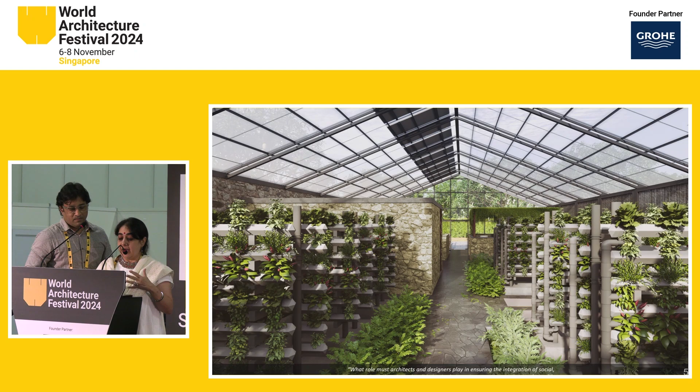Imagine future living - this is how we might be living. Future also holds possibilities like lack of clean air or water for sustenance, poor soil for cultivation, and scarcity of space. So what role must an architect play in ensuring the integration of social, economic, and ecological well-being in their projects? The future also belongs to rural and economically weaker communities.

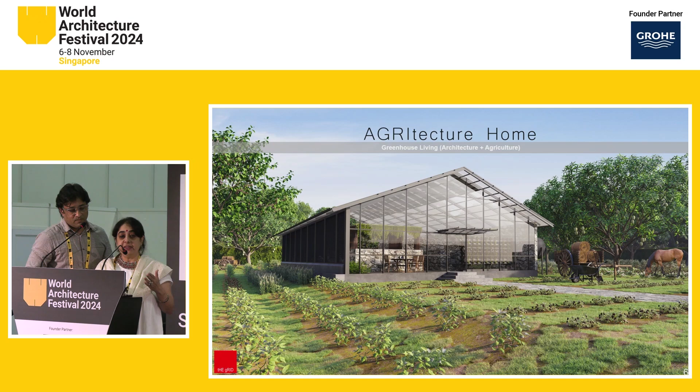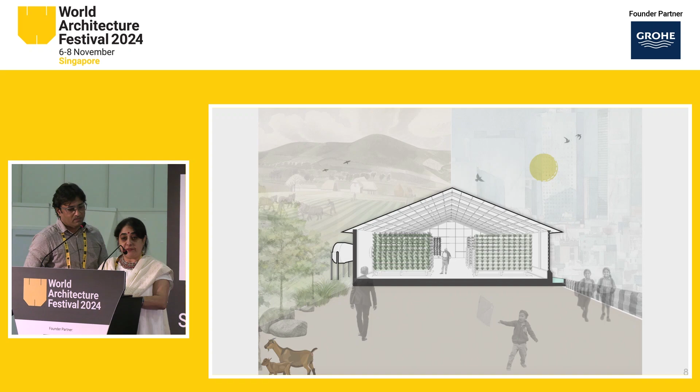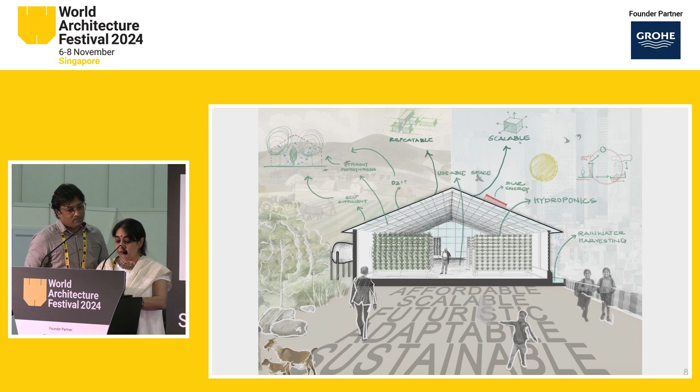This is our attempt at agritecture, combining the structure and function of a greenhouse with the functionality of a residential and workspace module. Why choose a greenhouse? When we talk of future home, we think of a home that addresses self-sufficiency in multiple facets: scalable, affordable, futuristic, sustainable, adaptable. Greenhouses are found in most places around the world. Our aim is to redefine the possibilities of agritecture.

A key feature of greenhouses is their ability to house hydroponic systems. The benefits are substantial: increased oxygen levels, higher production with minimal resources, and fostering self-sufficiency among users. The plan has all sufficient functions for living within the pockets created by the hydroponic zone. This unit has a solid wall of bricks or stone fitted with suction fans on one side, and the opposite side is made up of honeycomb pad and charcoal wall with an inbuilt automatic water sprinkler system. This helps keep the temperature around 24 degrees, ideal for hydroponics, and helps humans live comfortably.

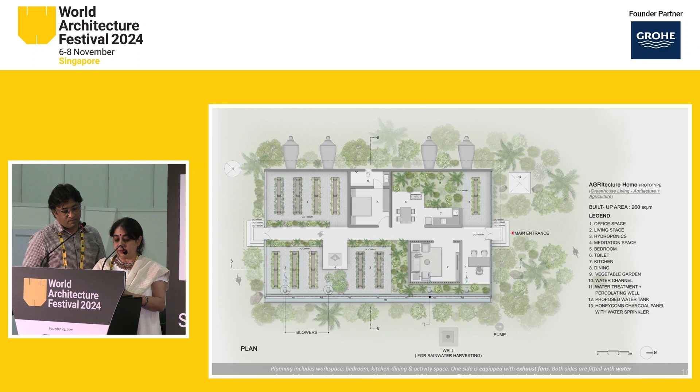This is a prototype proposed for a future experimental home - a single sample unit which is scalable, can be multiplied and duplicated. Both sides of the structure are fitted with water channels for rainwater harvesting, usable through a well and a hand pump. The honeycomb pad and charcoal wall combined with an automatic water sprinkler system ensure optimal conditions for hydroponic farming.

Suction fans provide adequate ventilation, contributing to energy efficiency and overall comfort. The charcoal wall regulates the greenhouse's temperature, utilizing charcoal's natural cooling properties; charcoal also acts as a natural water purifier. The pipe integrated with suction fans absorbs cool air and recirculates it, releasing it back into the interior space through underground conduits, much like the geothermal technique. This process not only conserves energy but also optimizes indoor temperature regulation, transforming the design into a hybrid model with a dual cooling method.

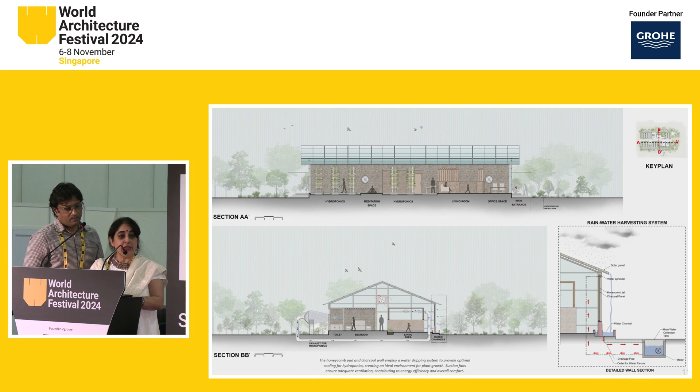The project emphasizes sustainability and eco-compatibility through several strategies, materials and technologies, utilizing reclaimed wood and MS, reducing environmental footprint. Polycarbonate sheets enhance natural lighting. The design integrates functional areas, highlighting soil-free agricultural efficiency. The project utilizes hydroponics to optimize food production, conserving space and resources while enhancing ecology. These practices provide for the family's needs and support the surrounding community through energy generation and locally produced food.

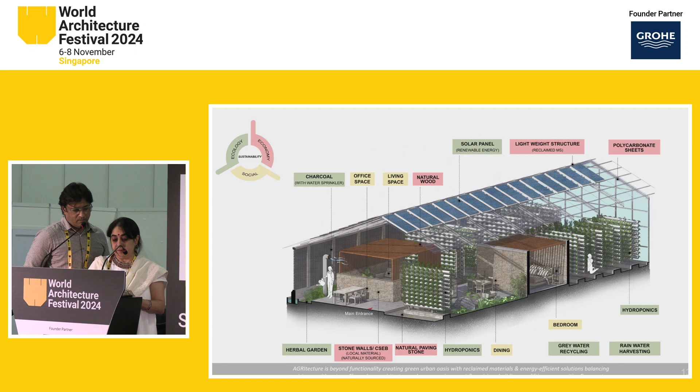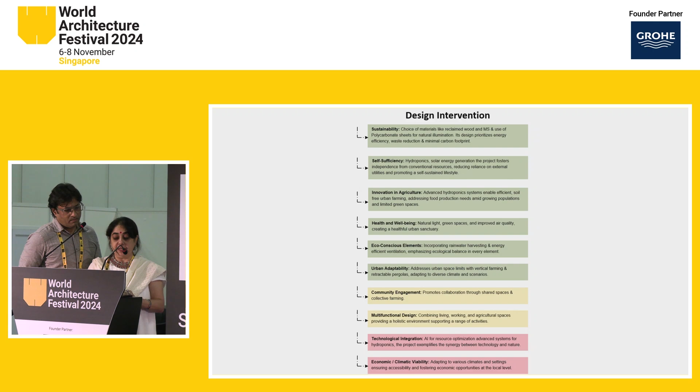This is the design for the honeycomb pad and charcoal wall. The design intervention achieves significant benefits: sustainability, self-sufficiency, innovation in agriculture, health and well-being, eco-conscious elements, urban adaptability, community engagement, multifunctional design, technological integration, and economic and climatic viability.

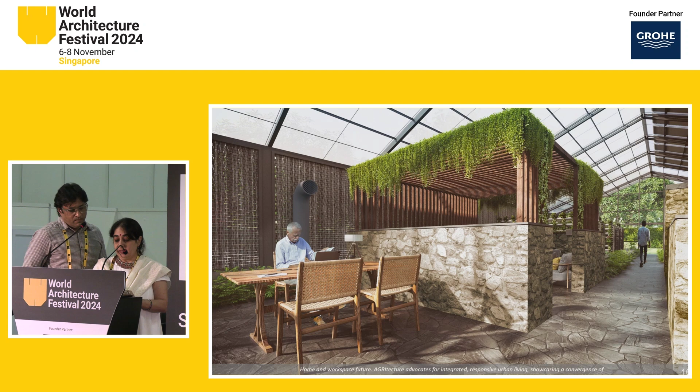We brainstormed various aspects to integrate agricultural elements with residential and workspace environments. The core principles of ecological, economic, and social sustainability are kept in mind, with reduced carbon footprint, improved indoor air quality, anti-aging effects, and enhanced mental well-being. Agritecture stands as an example of a symbiotic relationship between humanity and the environment, redefining the concept of a sustainable future home. It represents a shift in agricultural and architectural design and sustainable living. As agritecture emerges, we imagine a future where innovation and sustainability come together to create spaces that fulfill our needs and improve our lives and the world we live in.

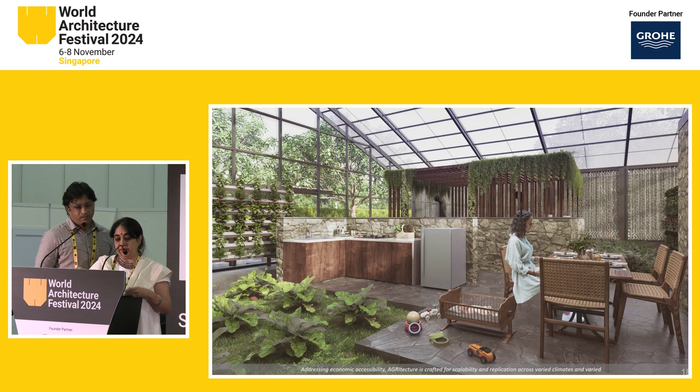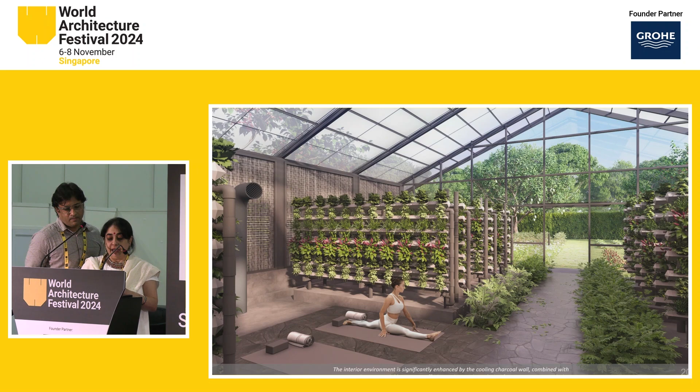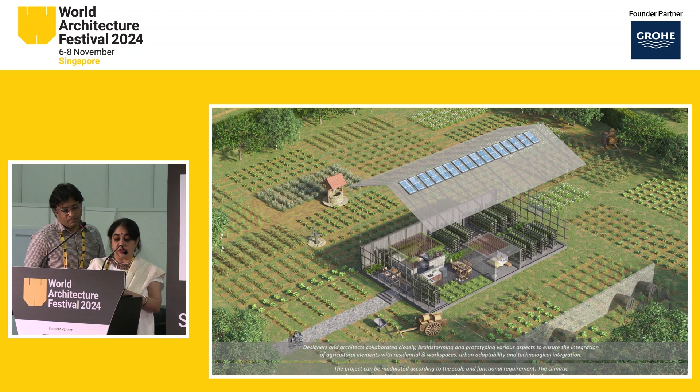Agritecture is a dynamic ecosystem that redefines the intersection of urban living and agrarian practices, advancing towards equitable and sustainable development. Innovative living spaces foster ecosystem harmony, envisioning tomorrow's eco-conscious responsive habitats, emphasizing urban adaptability, vertical farming, and technological integration - redefining homes for a greener tomorrow.

A very humble and honest idea for the future well-being of humanity. It is the conscious responsibility of mankind. Here we have used all natural materials and textures from Mother Earth. We would like to show you a quick video for the same.

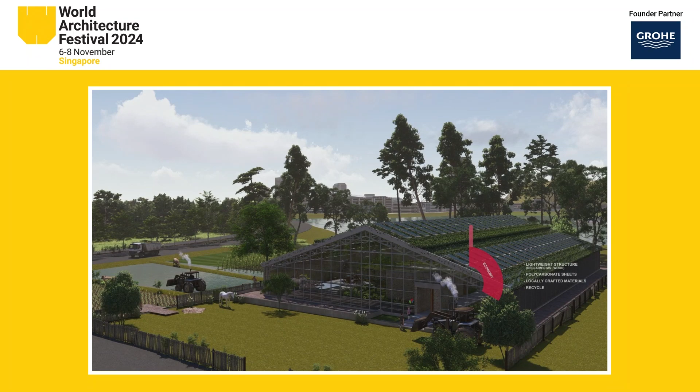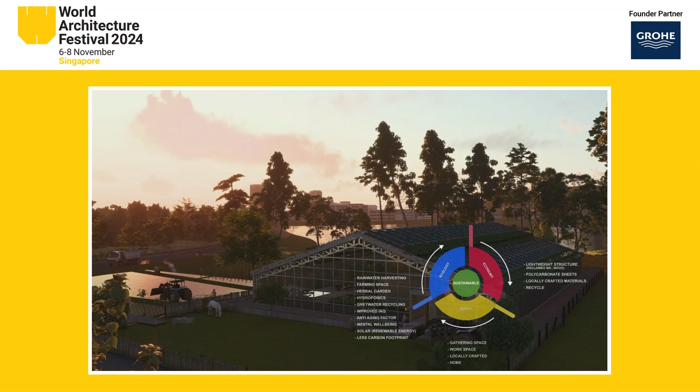This kind of structure can go completely off the grid. Your dependency is not there on any suppliers like water supplying or electricity. It is a completely self-sufficient structure. Thank you.

Our second presentation, also about food production, comes from Fractal Views, and it's called Parasol Agri Center, an Agricultural Center.

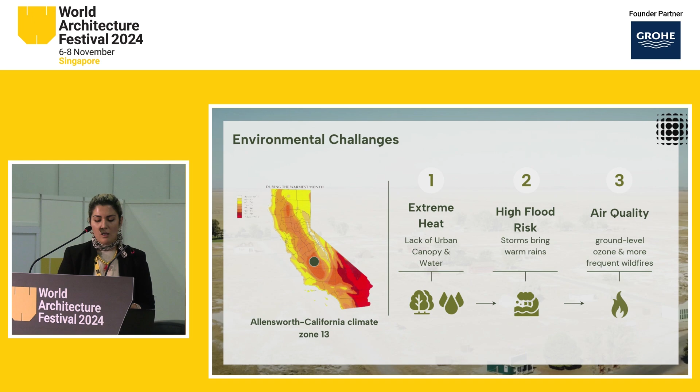The environmental challenges such as extreme heat and lack of urban canopy, being located in a high flood risk area, and air pollution caused by proximity to wildfires and factories around.

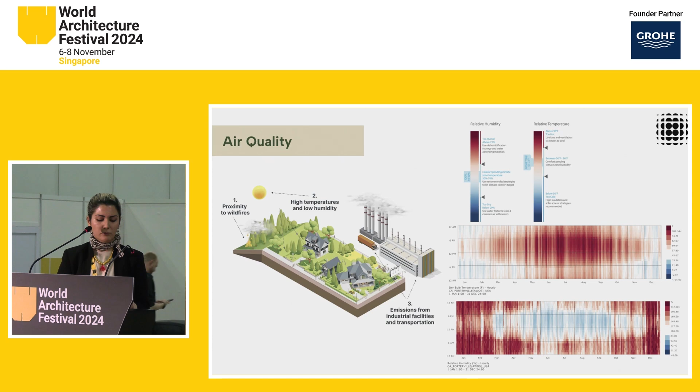The succession to the design of this project is also backed by experimental and iterative building science analysis. It started by some basic fundamental questions about how the building mitigates heat exposure while enhancing energy efficiency.

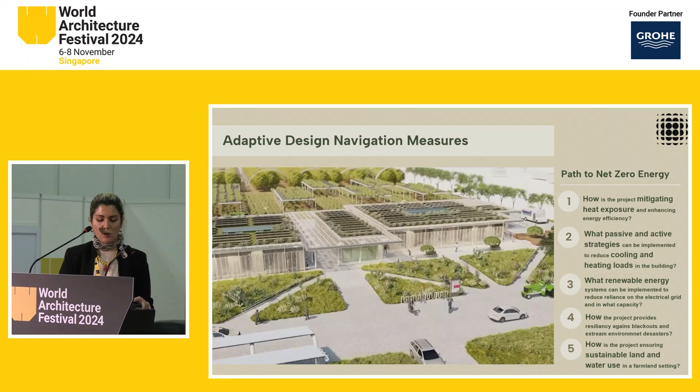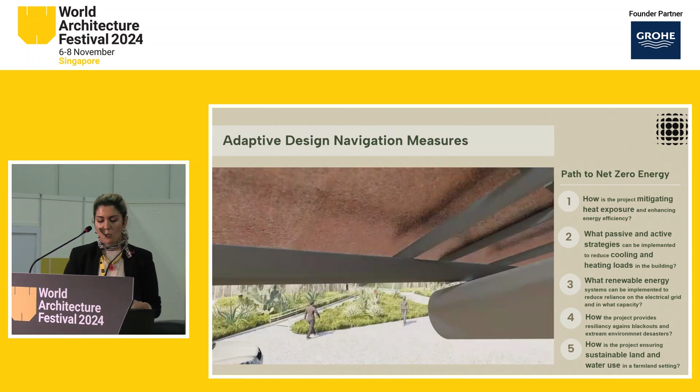Questions about the kind of passive and active strategies incorporated into the design, the kind of mechanical system selections, the capacity of renewable system selections, and resiliency against blackouts, and water management across site strategies.

We started our experiment by benchmarking and setting an energy use intensity target, basically running multiple design analysis and simulation models to achieve that EUI target. The green chart highlights the key design strategies for achieving the EUI and finally net zero energy.

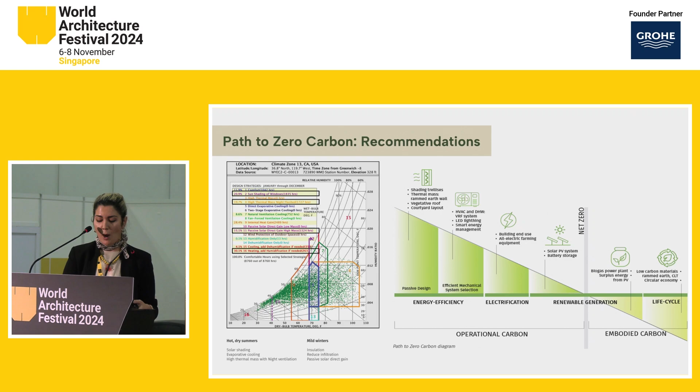The strategies include maximum shading and solar control, along with indoor vertical farming courtyards to bring down the cooling load, the use of high thermal mass materials such as rammed earth for the perimeter of the building, an efficient mechanical system to respond to the cooling load (in this case a VRF system), and renewable energy solutions such as solar panels alongside biogas from farming waste.

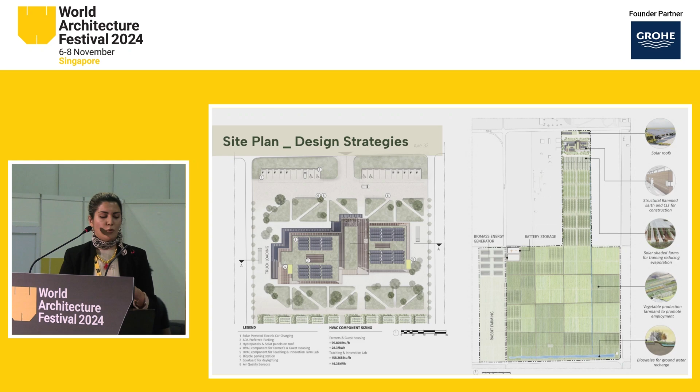This is the distribution of the program within the site. We thought about the farmland within different layers. The closest layer of farming ability is nearest to the building, dedicated to research and development for the program. The second strategy visible in the land is the use of bioswale for water management and collection.

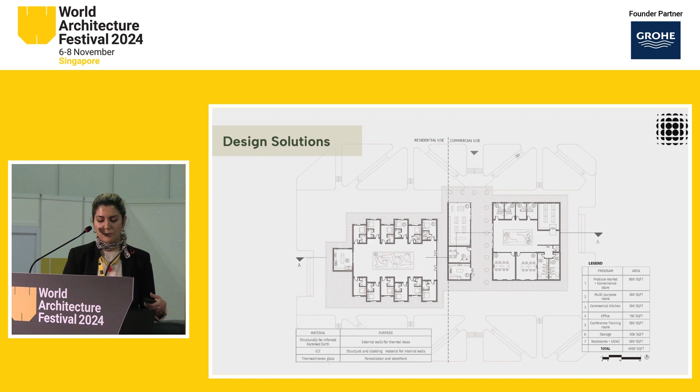In broad perspective, the program is distributed in 2 different wings, and each wing is equipped with central courtyards, providing the ability for vertical farming that also creates air filtration and a cooling effect for the whole building.

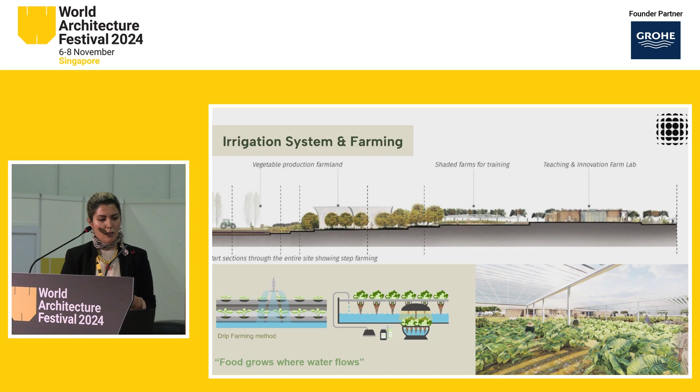As food grows where water flows, water management for the whole site was an important factor. The step farming strategy incorporated into the design collects water through bioswales, and you can see the shaded farming close to the building dedicated to the research and innovation lab.

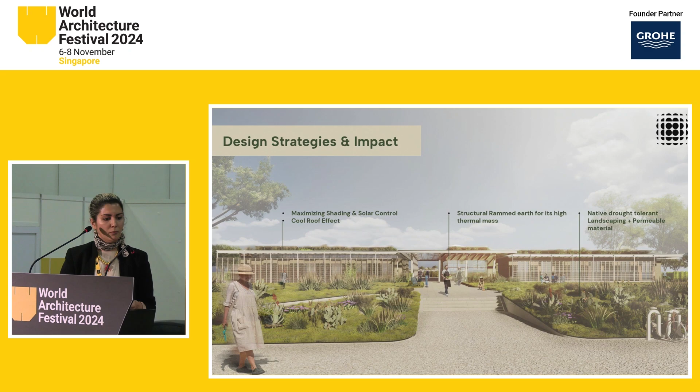The core design principle for the center was structural rammed earth for its high thermal capacity, coupled with an overall shading shelter to bring down the cooling load. Additionally, to create more cooling effect, the project incorporates drought-resistant vegetation for the roof, coupled with solar shading that gives better energy control for the building.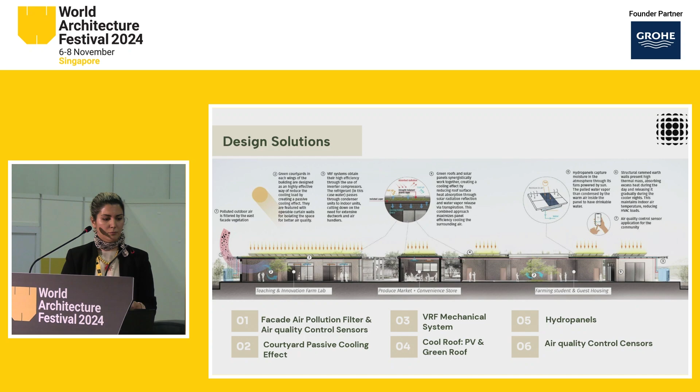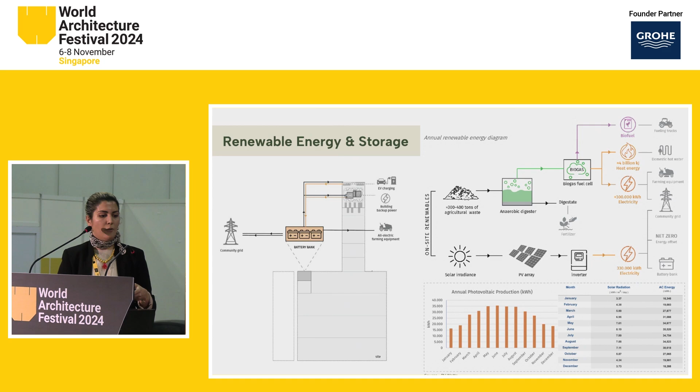This is the use of energy management: solar panels coupled with the biogas system, also conserving energy to return to the whole grid and serve the whole community.

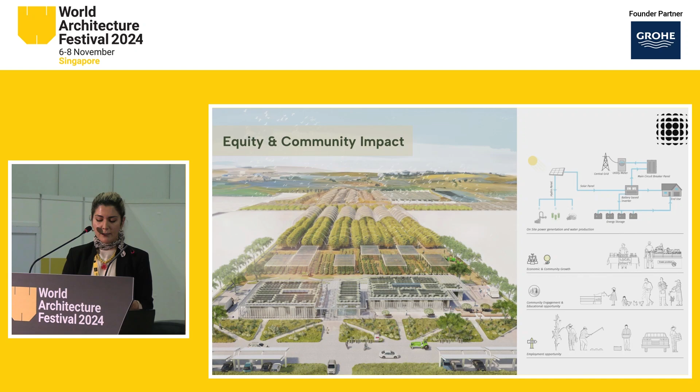For the final note, the Parasol Agricultural Center makes a fresh start in the Allensworth community, providing enough energy not only to support itself but also to serve the whole area. Here, the community gathers under a broad canopy that offers community engagement, self-sustaining economy, and resiliency. This project promotes equitable built environment in the area and beyond, embracing community values and a sustainable farming future. Thank you so much.